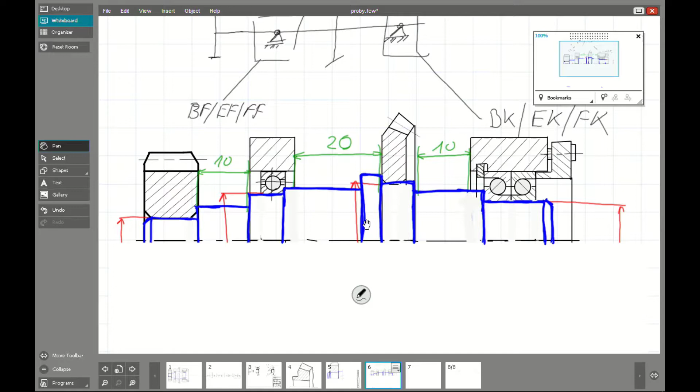Hello again. Today with Grzesiek Linkiewicz and Mateusz Żurawski we prepared the next material: how to solve such a problem of the fixation element of our shaft. You remember that project, it was some preliminary project of the powertrain system.

Here we have the gear, here we have the bevel gear, floating support, pin support, and as you see, those elements are not fixed on our shaft. It means that there isn't anything which prevents the movement of the elements on our shaft. That is why today I will show you how to make fixation of some elements of our shaft.

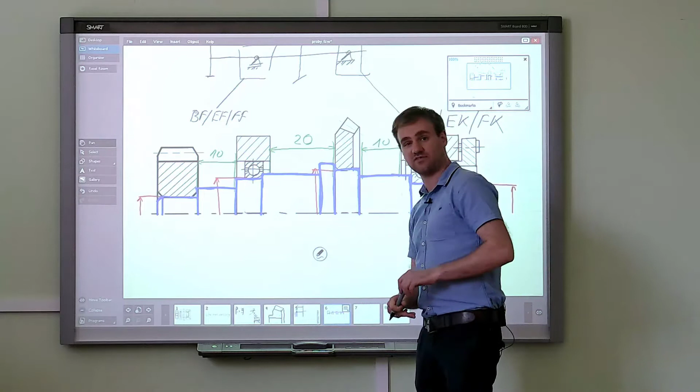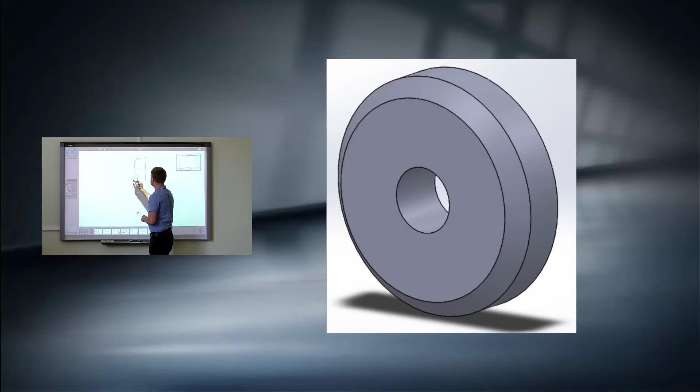And today we will use some kind of flange sleeve, or even better, some kind of flange. It will be a simple element, some kind of disc with a hole inside. It means our element will look like that. It is a view. I will show that thing in the half view, half section. Of course, center line. Of course, edges should be heavy. That is why I make it heavy.

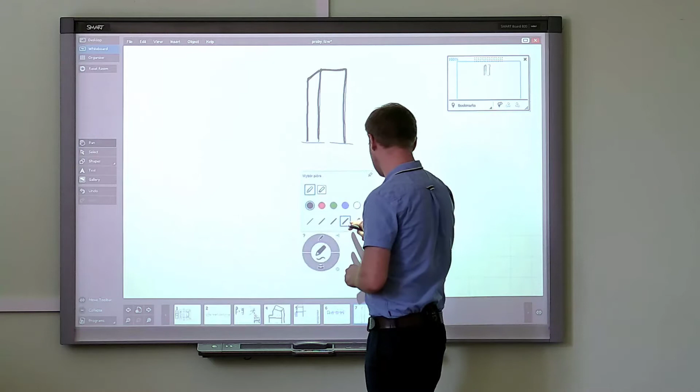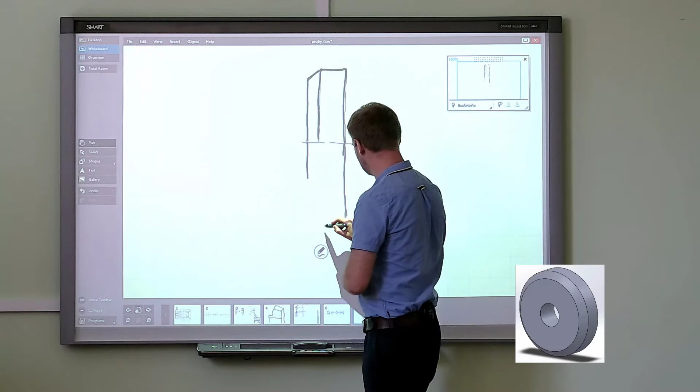And if we are talking about the half view, it will look like that. Contour, something like that, contour, hole inside, and some really small chamfers to make the mounting of that thing easier. Okay, it means that here we have such an element, such a disc with the hole.

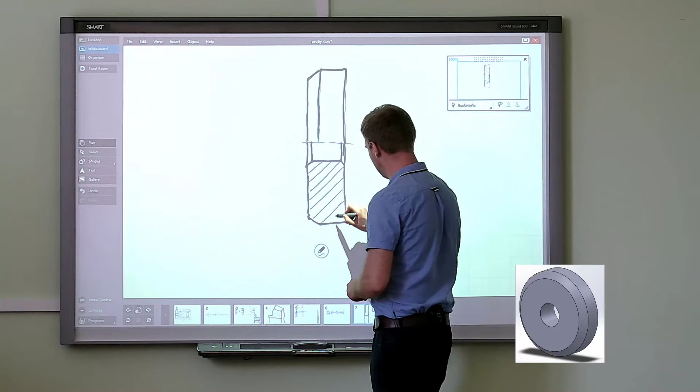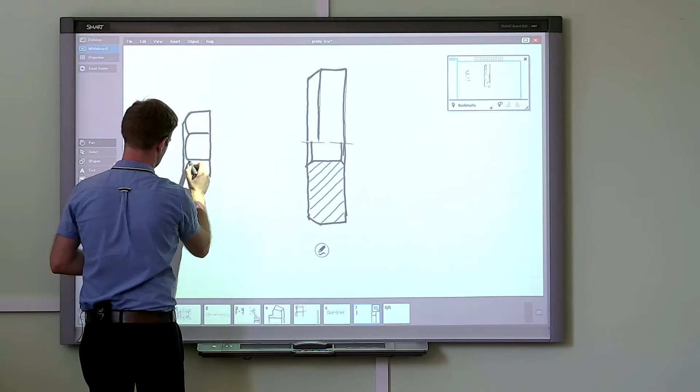And using that thing and using a simple screw, I mean the hexagonal bolt, we will be able to fix some element, for example a bearing or gear, on our shaft. It means that that element plus, sorry, it isn't a good way, it will be the head of our hexagonal bolt. We remember hyperbolas, the center line of the whole element, and the core of the screw.

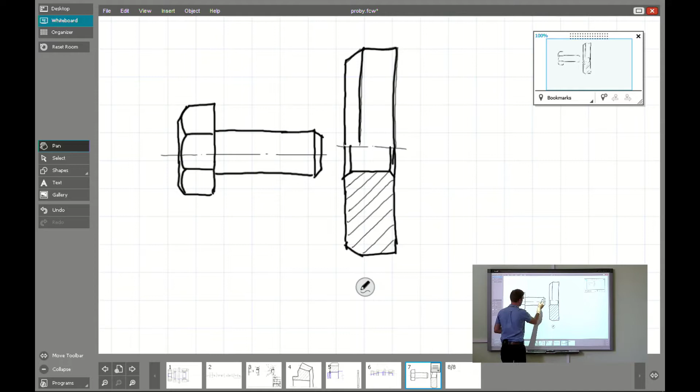Of course, now we have only something which is similar to a pin. That is why I have to introduce the thread. Okay, and using that element, using our disc, and using a threaded hole in the shaft, we will be able to fix, for example, that gear, or to fix those two bearings.

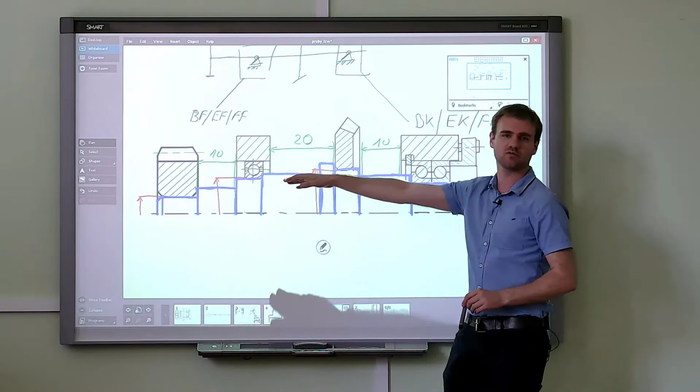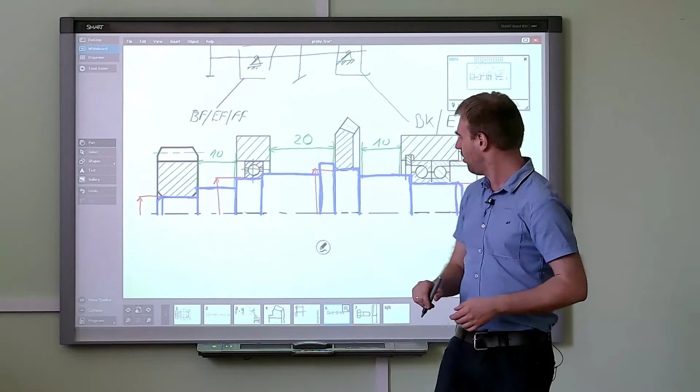Because last time I showed you how to fix the gear, today we will fix those two bearings. And of course, because it will be put at the end of our element, we are able to use that solution only at the ends of our shaft. Okay, let's start with our case. Sorry, I need to remove that line, and I have to remove those dots. Okay, let's start with the center line.

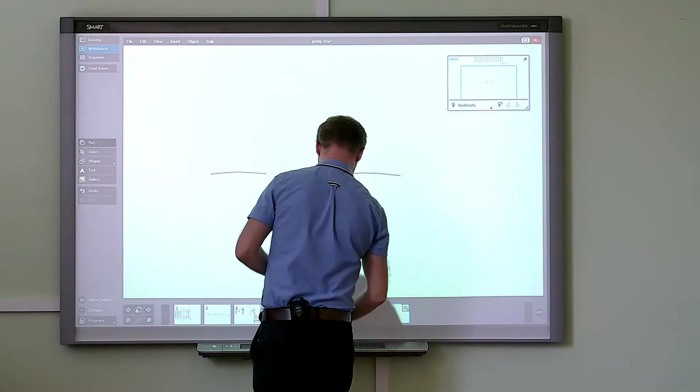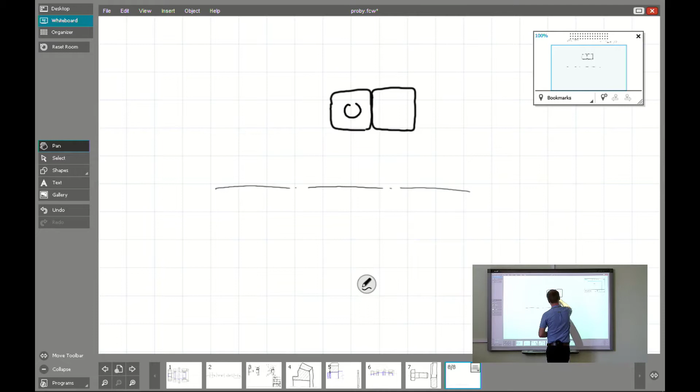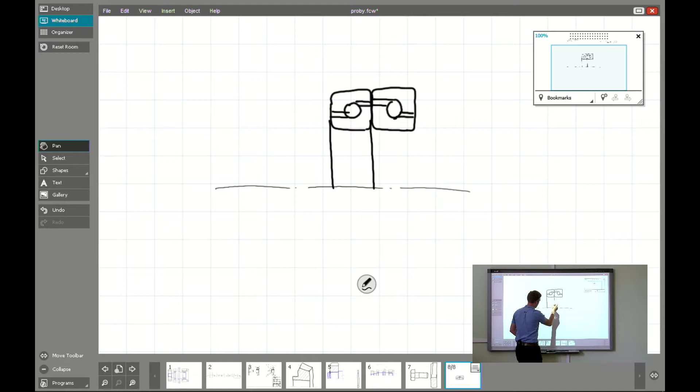Let's start with our bearings. Like last time, first I will start only with bearings. Next, we will remove unnecessary lines because it will be easier to figure out what's going on with that method of fixing our element. Okay, here we have the pair of bearings. We remember about the axis, I mean the line of action of our forces in the bearing, and of course hatching, and hatching with the opposite inclination, something like that.

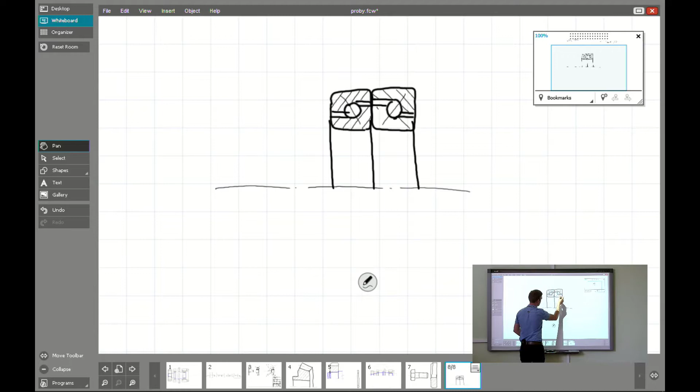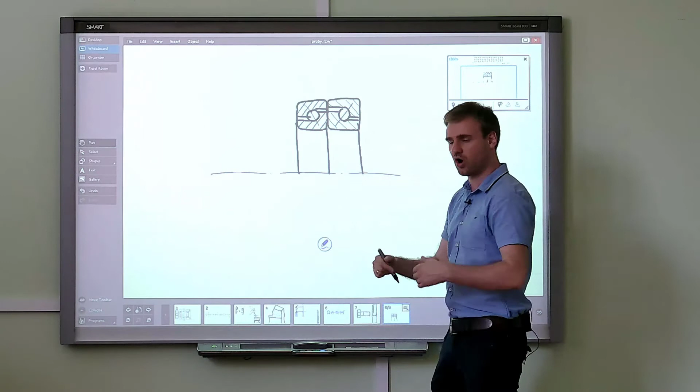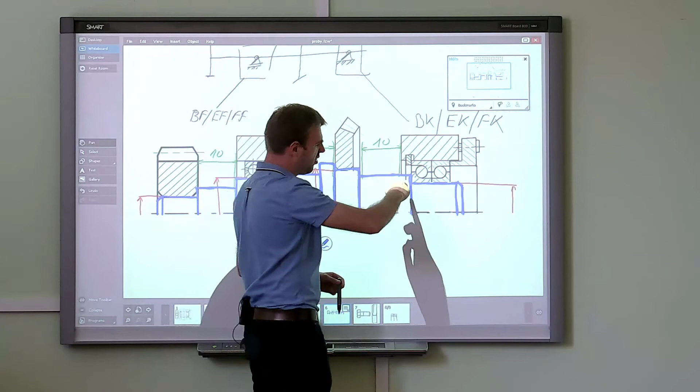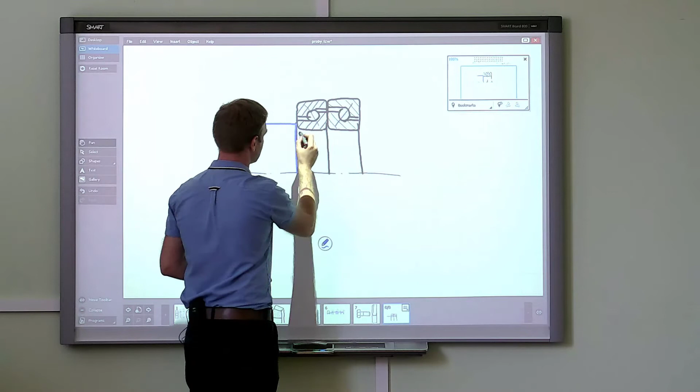And of course, because here we have the hole inside our bearings, here we have the radial lines. Okay, and now we will draw our shaft. And look, guys, first thing, according to our project, on the left side we will provide an extra step with a bigger diameter, and that step prevents any movement along the axial direction of the shaft, but only on the left side. It means that on the left side, our system is fixed.

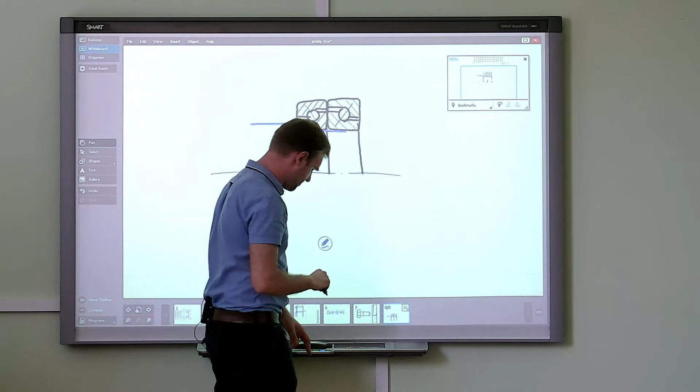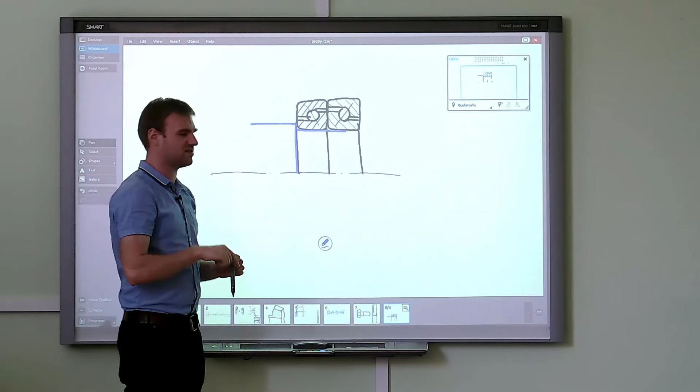Now we have to fasten somehow the right-hand side. Okay, and for that, because we need to ensure some clearance between that disc and the screw and the shaft, this time we will make the shaft a little bit shorter. Okay? It means that by the blue line, the contour of the shaft is given.

Next thing, of course, will be to remove the unnecessary lines. Of course, the shaft will hide those lines. That is why I remove that line in that area. Okay, next step will be to provide our disc, which will prevent any movement on the right side of our system. Okay, let's use again the black line, of course the heavy line, and as you remember, it will look like that.

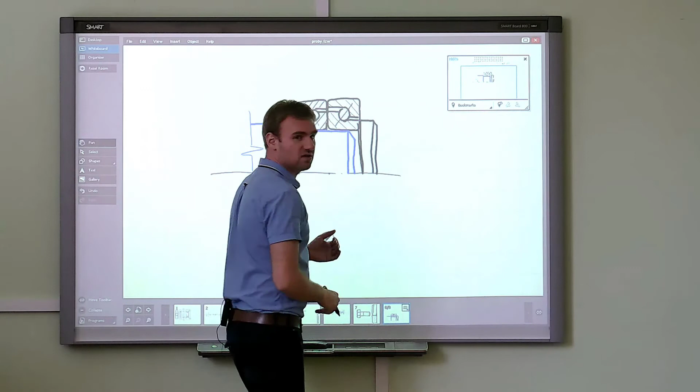Because it will be some kind of assembly drawing, there isn't any need to draw that in the section. That is why I draw that in the view. It will be easier and faster. Okay, here we have our disc. This disc fixes our bearing system. Of course, now it isn't possible to provide that fastening because now this disc is free.

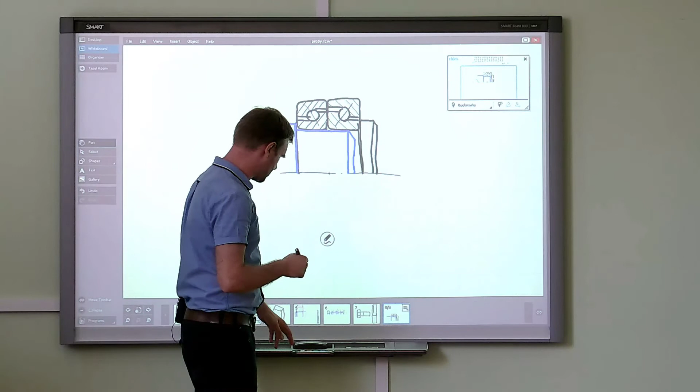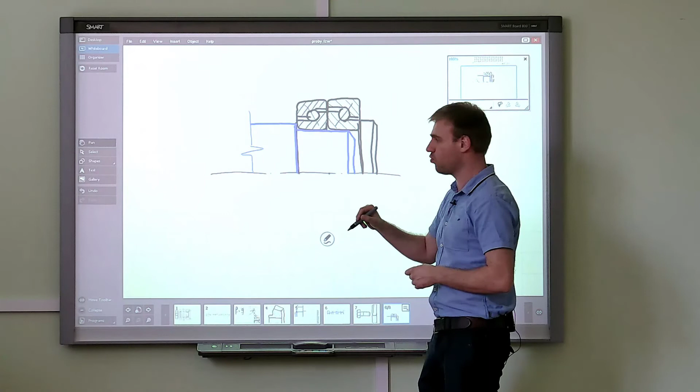And that is why I will use our screw which was mentioned previously. Okay, I will provide our screw, and here we have an important thing, because to make the proper screw connection, we have to remember about the washer, okay? And this time we will provide the spring washer because it's the typical solution. A spring washer looks like that.

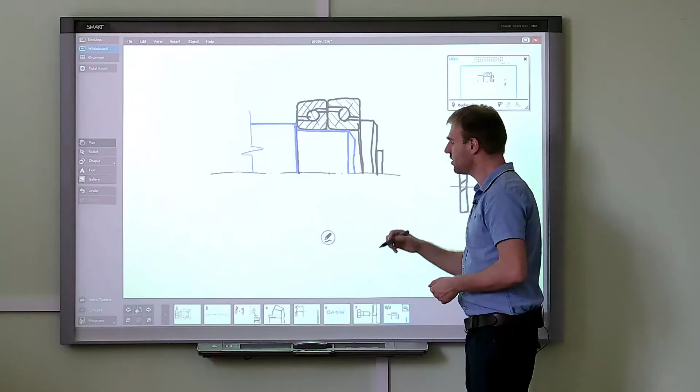It is some kind of washer, I mean a really thin disc with some small gap, and it acts like a spring and prevents unscrewing of the whole connection. Okay, let's draw our spring washer, and because it's only half of our drawing, I will draw only one line connected with that gap. Okay, what next? The next element will be the screw.

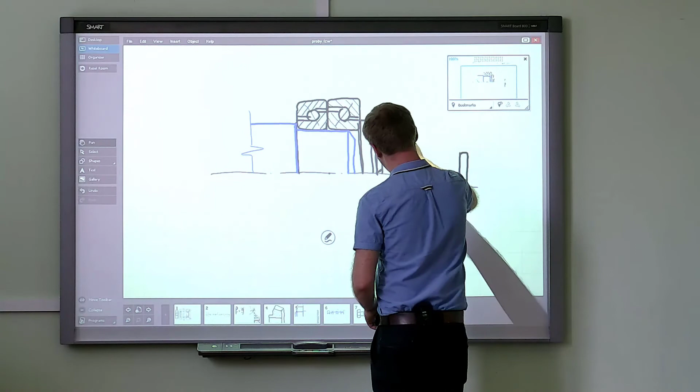I will draw the head of the screw, of course, and here we have our head of the screw. We remember that it will be chamfered on the edge, and of course we have to draw the hyperbolas to show that it's a hexagon. I mean it's a hexagonal cuboid with the chamfer, and now we have the drawing of the head of the bolt. That bolt keeps the disc and the whole system in the rest position.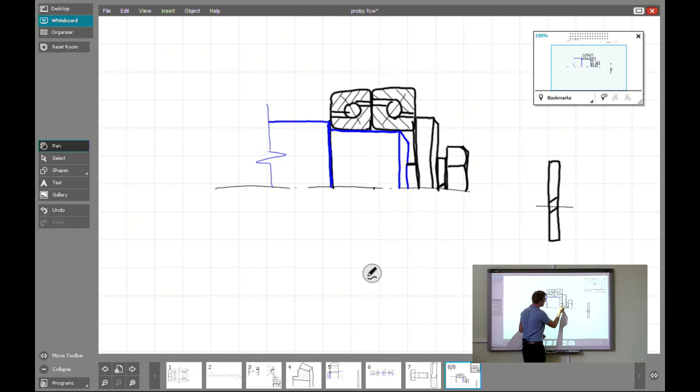And look, here we have some empty area. It is the empty space, and generally part of our bolt will be visible because that bolt, like in the case of our screw connection, will be screwed into the shaft. That is why in that area I will have to draw the part of our bolt. Here we have the core, and by a light line I will show the thread.

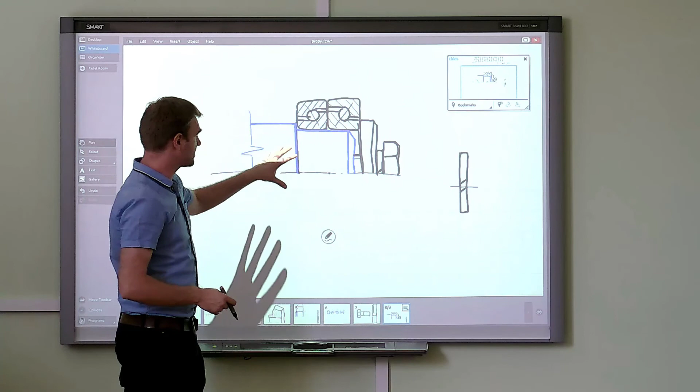Important thing, look, the washer is bigger than the diameter of the core. It's obvious, because in our washer we have some hole. And using such a simple solution, we can fix 2 bearings or 1 bearing or gears on our shaft.

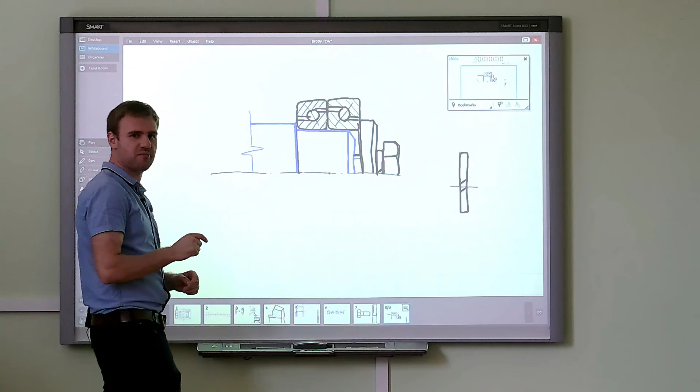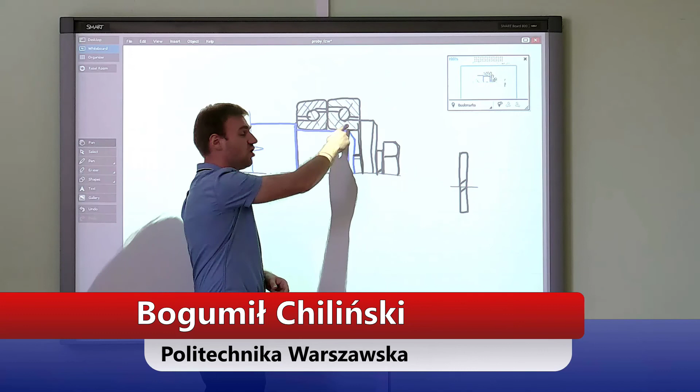What is really important, we have to remember to ensure some clearance here, because look, if there isn't any clearance here, it is possible that we will compress the shaft, not the bearing system. It means that if there isn't any clearance, it is possible that the clearance will be between the bearing and the disc. Okay guys, that's all.